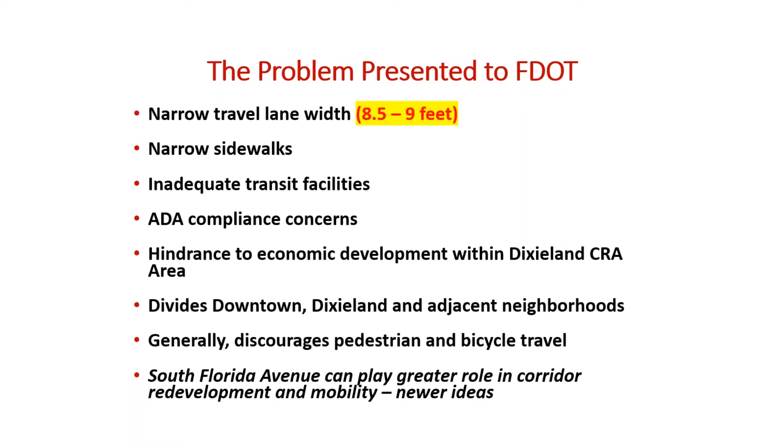And so for years, we had tried to figure out what does the corridor look like? What could it look like in the future to improve safety and mobility? And so the Department of Transportation came to us with an idea on a process to do just that. As you can see here, we were struggling with trying to redevelop this corridor, encourage more folks to come to the businesses that were really pedestrian and neighborhood oriented.

But as you can see here, pedestrians in a limited sidewalk area were really in danger of stepping out in front of cars that, while the posted speed limit was 30 miles an hour, were generally moving much faster than that. So over time, businesses began to put cones out, put homemade signs out to ask motorists to slow down. And so we really began to see more and more of an indication that business owners, in addition to the neighborhoods, were really demanding that something be done.

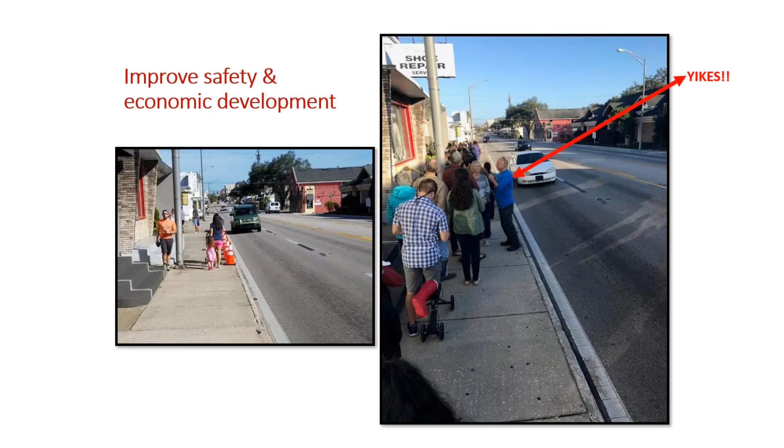And so the DOT approached us with a plan to look at the corridor from not only a traffic level, but also from an economic development level and an urban design level. And so they engaged the Central Florida Regional Planning Council to conduct a public outreach effort that also included a design studio from the Treasure Coast Regional Planning Council over in Southeast Florida to engage the public through a week-long series of intensive planning meetings or charrettes, design studios, and working with the individual property owners to come up with different visions of not only what the corridor, the roadway could look like, but also how it could generate additional development opportunities, whether it's additional residential, additional business activity.

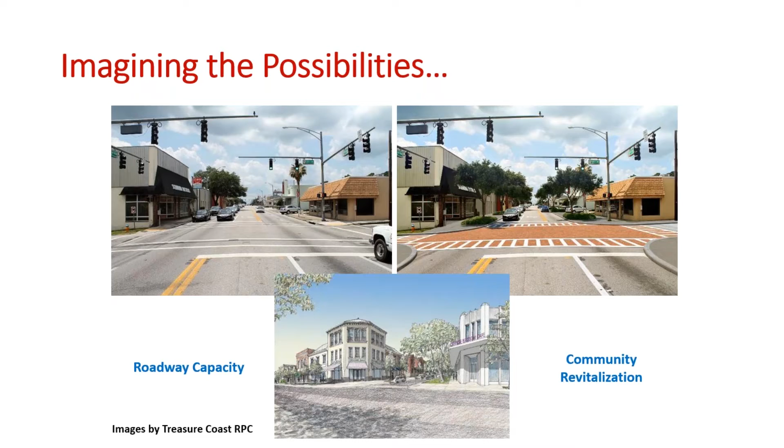And so at the end of about a year-long process, the Lakeland City Commission actually voted to support moving forward with redeveloping or doing something in this corridor. They acknowledged that the corridor was woefully inadequate and something needed to be done, and that if a road diet were pursued, that a 1-year test period be implemented to look at how the reduction from 5 lanes to 3 lanes would affect not only travel times in the corridor, but also traffic on the adjacent streets and the surrounding neighborhoods.

We also work with the Citrus Connection, our transit operator, to look at other types of transit options for the area. There was a concern that buses stopping within one lane or one through lane in each direction would create additional congestion issues. And so the Department of Transportation has funded a temporary circulator route where the buses were actually running on parallel streets east and west of Florida Avenue to serve the same traffic demand with much more frequent service. And actually the monthly passenger counts are well above expectations, even with the general reductions nation and statewide in transit activity due to the COVID crisis.

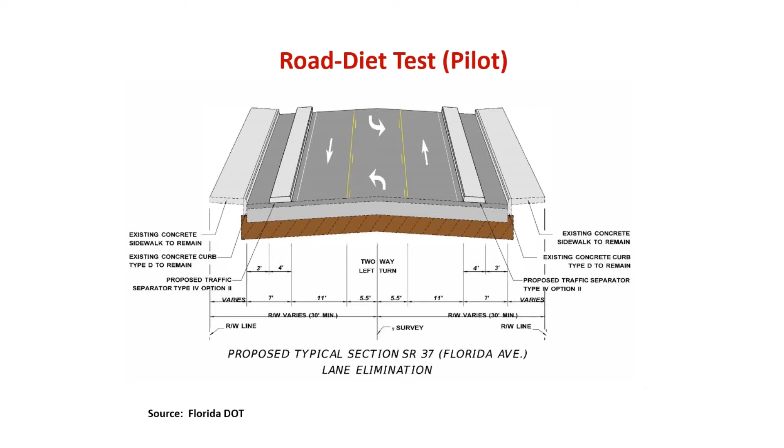So with that, I will turn it over to Angelo, who will talk about the test and some other exciting things happening in our city. Hey, thanks, Chuck. I appreciate it. I think I'm on. Hopefully you can hear me. Angelo Rao with the City of Lakeland, Manager of Traffic Operations and Parking. I don't have a lot of time, so I'll go as quick as I can. As Chuck said, we're really excited about the partnership with District 1 and the way we're putting together State Road 37, South Florida Avenue together as a team. We really appreciate that. Again, I'll move very, very quickly through these slides.

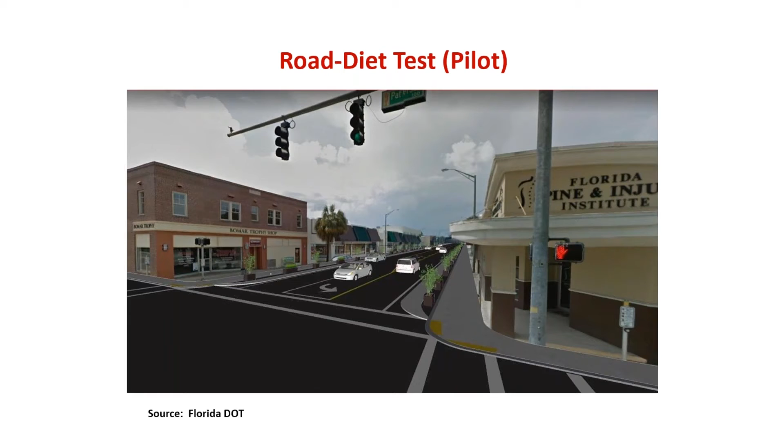Let's see, that's the vision of tomorrow, and it's kind of there today. And you'll see, Chuck, I guess this is the peach line you were referring to just a moment ago in terms of the way the system is being reoriented from an express route and a collector route in terms of working with Citrus Connection. So they're a great partner as well. We thank them as well.

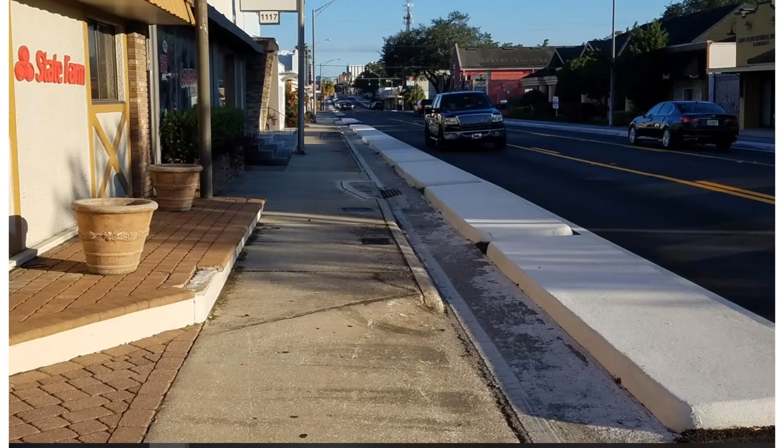There we go. So this is what it really looks like in real life. It may not be the prettiest thing in the world. It's not going to win any major awards, but it certainly changes the character of that curb line, going from this curb line to this curb line. What actually happens in this zone will be up for discussion and debate once the study is complete. This is just to test what happens from a safety and operational perspective during the test period.

And by the way, to the best of our knowledge, this is practically the most expensive test that we're aware of that the state has ever conducted, over $1 million on a test project. And we're very proud of District 1 being bold and brave to put this together for us. Thank you so much.

There's kind of what it looked like before. And in real life, this is how it's operating. Again, not going to win any major awards from an aesthetic perspective, but really from a point of view of doing the job, it really does the job well in the way it changes the character of that cross section from 5 lanes to 3 lanes and manages not only traffic in a more calmed way, but also reduces those exposures to pedestrians as they cross the street from a 5 to a 3-lane roadway.

And Chuck talked about this in terms of alternative routes and roadway safety audits. I don't think I need to go over that again. This very busy slide, the real point of this very busy slide is just to show you, let's see if I can get the left, no, it doesn't want to proceed. Let me see, do it again.

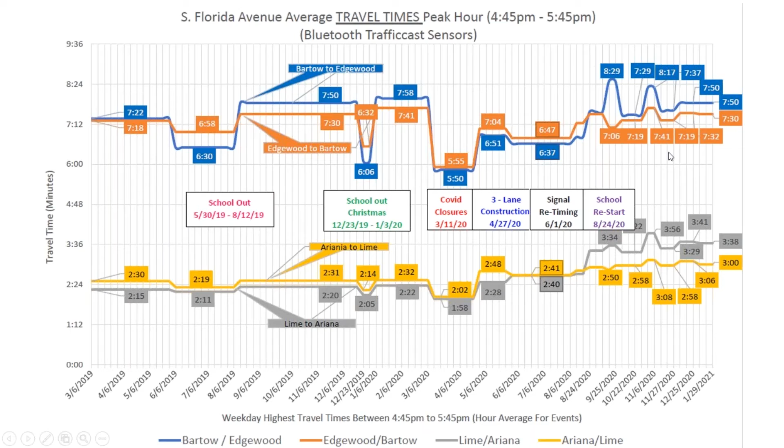So the question of the day is, is 1 minute of additional travel time through this development zone okay or not okay compared to the economic development, the safety, the opportunities to the city as a whole, and frankly, the district in terms of its management? Time will tell when we get commentaries from folks. So I just wanted to differentiate those 2 corridors.

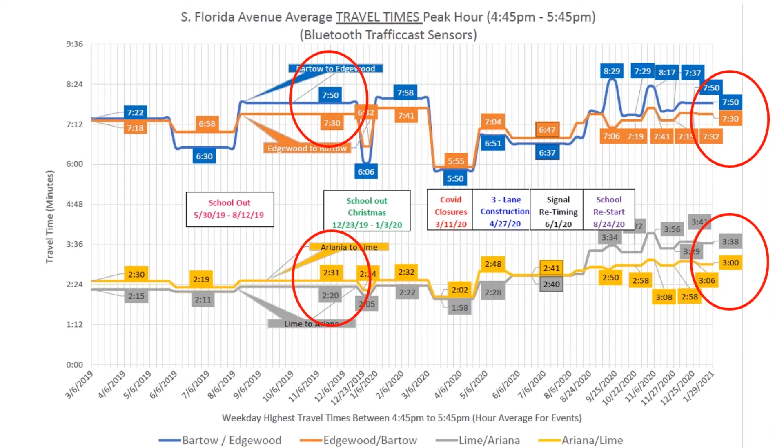I won't spend any time on this. This is just to thank again the state on helping us with data. Data is so important in telling the story. So I just wanted to spend a moment on that.

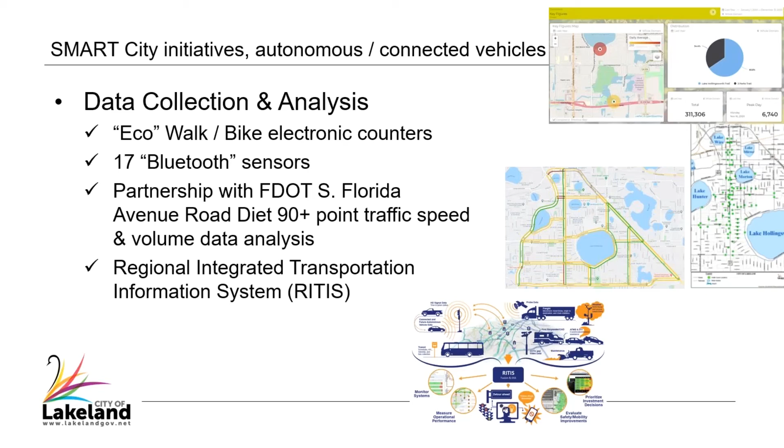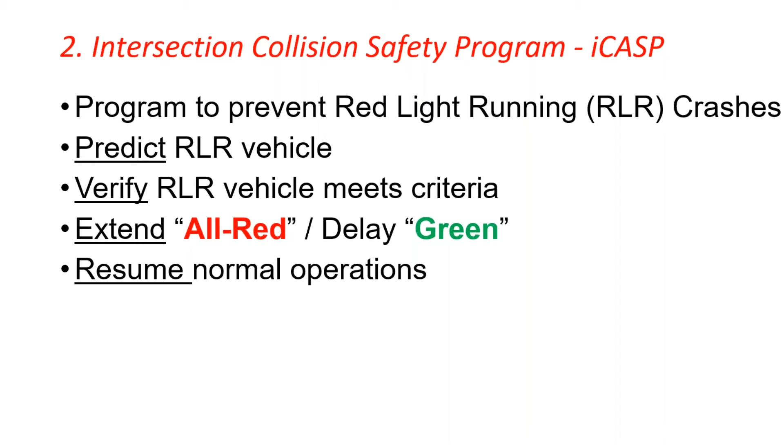Next item is the iCASP program, Intersection Collision Safety Program. I'm going to go very quickly, but the gist of it is basically we just introduced a program working with District 1 and Central Office on a safety program to save lives in terms of predicting red light runners, and then extending the all red and delaying the green at the same time. It's a great partnership. We're very proud of it.

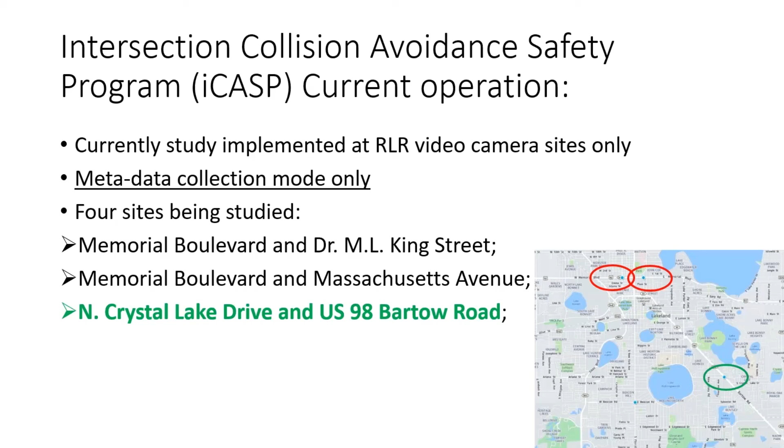So I'll just go really quickly through these four test sites that we're doing right now. As you can see, I won't even list them. You can see them right in front of me. I know that we're short on time, but in terms of conclusions, think of this. When we did our first study, 48 every single day at one intersection ran the all red light when the green is on. Folks, this is every single day, nonstop at every single intersection. Not necessarily 48, it depends on the intersection, but certainly that gives you an example.

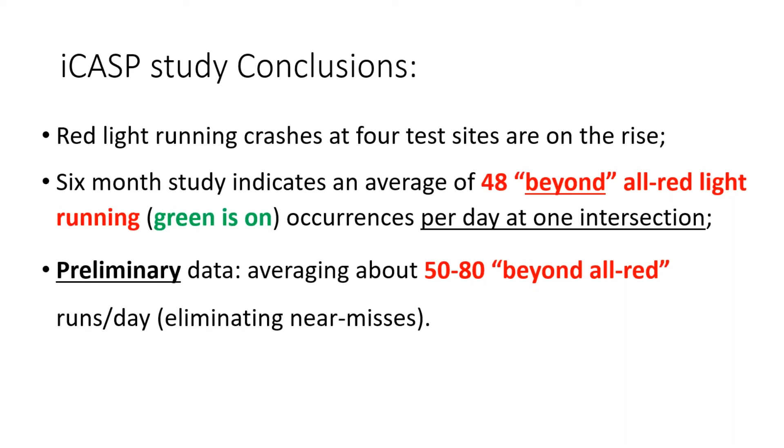And right now, our preliminary data with the 4 intersections are showing that we are preventing about 50 to 80 near misses with the Beyond All Red phase. We're very proud of that. In fact, we're going to have a meeting this afternoon to confirm those numbers. So in terms of South Florida Avenue, again, with the workshops that are taking place, and Chuck mentioned that, I just wanted to reiterate that.

Again, moving very quickly, the final one I want to talk about is Memorial Boulevard, US 92. You've heard a lot about the HAWK treatments, but this is really a compilation of 13 elements in a chain of pearls coming together. We typically find in our business that one thing doesn't quite do it. You need to put things together. I learned that from Mark Doctor at FHWA. If you've seen some of his presentations with the slices of Swiss cheese, it takes a lot of Swiss cheese to put projects together. It's kind of an interesting analogy.

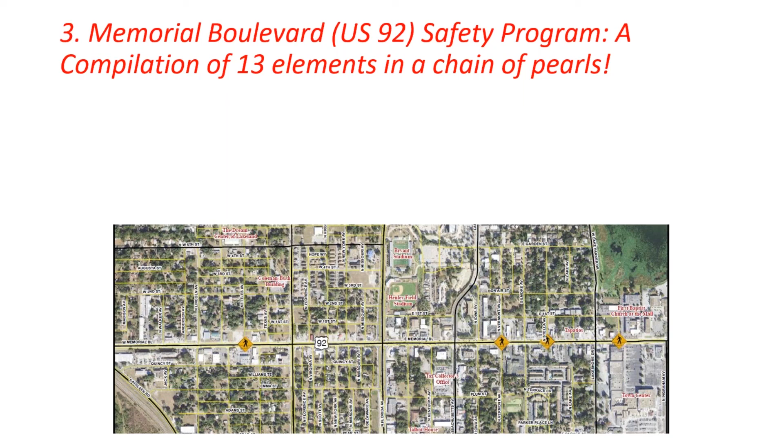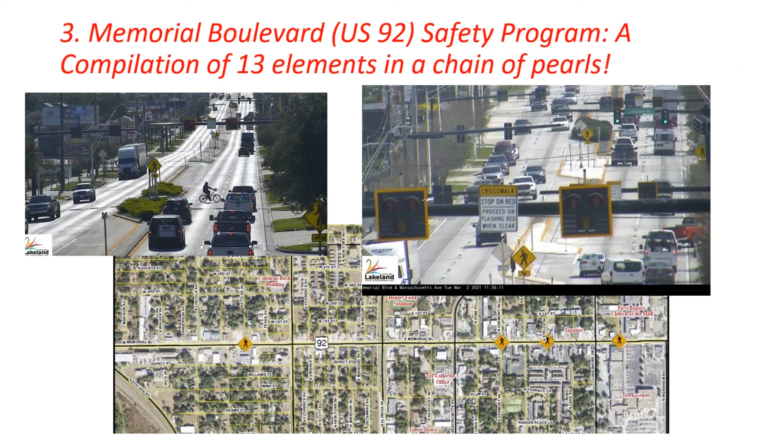So here it is real quick, 4 HAWK signals or hybrid signals that you've heard of in the past. And there they are in aerial view, if you will. That's an actual snapshot from our TMC. And here's one of our very own. I wanted to make sure that I got one that really works. That's one of our very own employees riding that bike across, and we caught that shot. So we're very proud of the way our relationship with District 1 has been over the years and will continue to be for many years to come. And I think that's it.